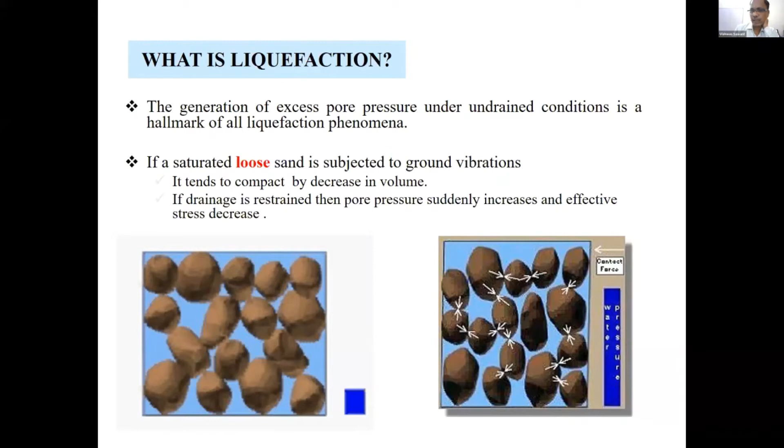Okay, so what is liquefaction actually? Basically, it is the loss of strength in the soil because, in the case of dynamic shear loading, if loose sand is there, it will try to compact by expelling water out from the pores. But because no drainage is available due to the time constraint, this leads to a buildup of pore pressure. As the pore pressure builds up, effective stress, which equals sigma minus u, will be reduced to zero. In that case, if it is a cohesionless soil, it will lose its complete strength and its shear strength will become zero, and it will behave like a liquid. So this is the mechanism of liquefaction.

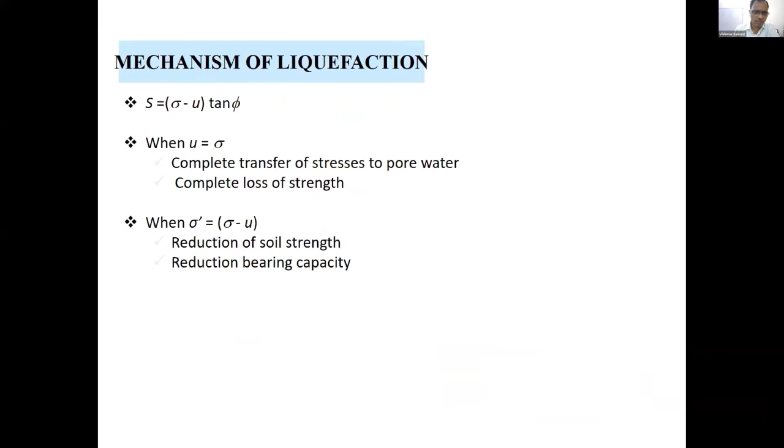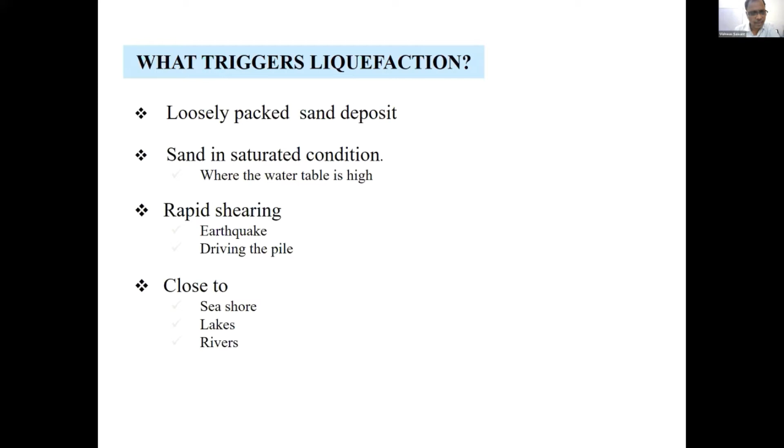I am just quickly rushing through this. There are three conditions required: one, the sand should be in a saturated condition; it should be a loose sand deposit; and there must be rapid shearing. This is very frequently observed near seashores, lakes, and river beds, because all three conditions exist in these particular locations.

Now, what is happening in liquefaction? There will be sand boils, subsidence of the ground, and inundation of the area due to ejected water. There will be differential settlements. Buildings or structures supported on it may overturn due to differential settlements, and there is also the possibility of sinking of buildings.

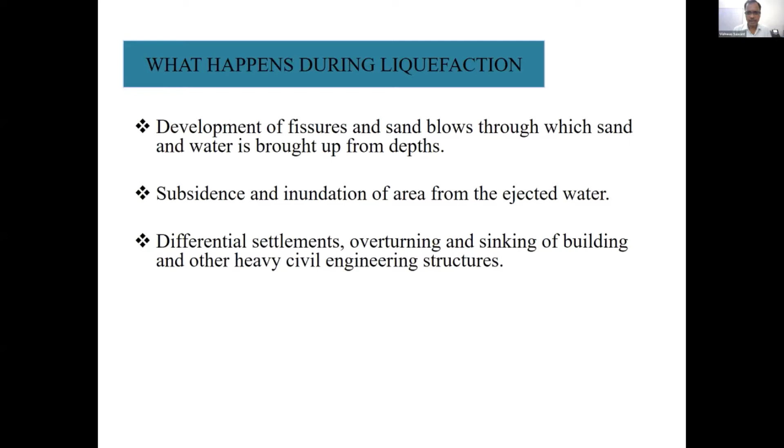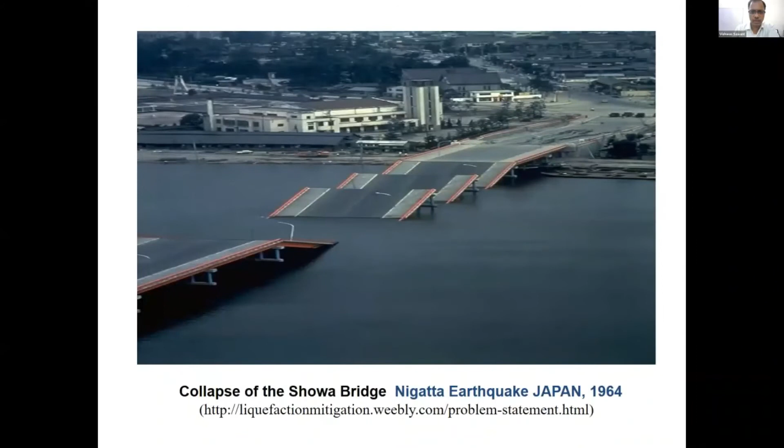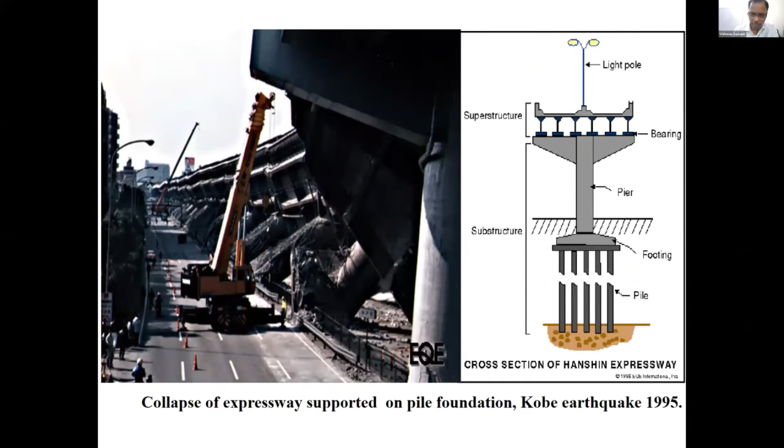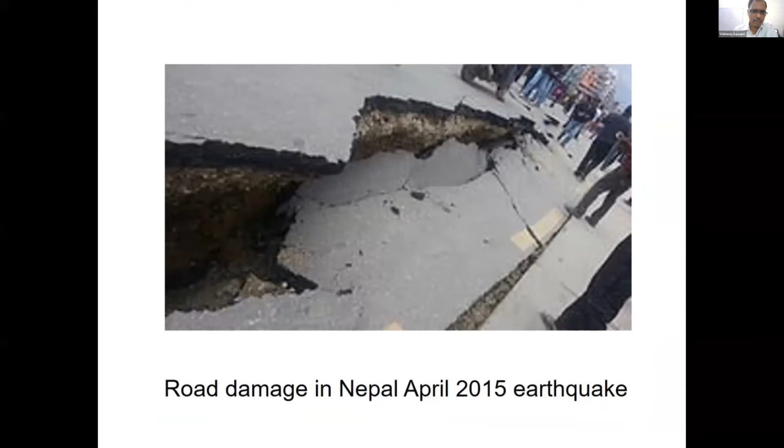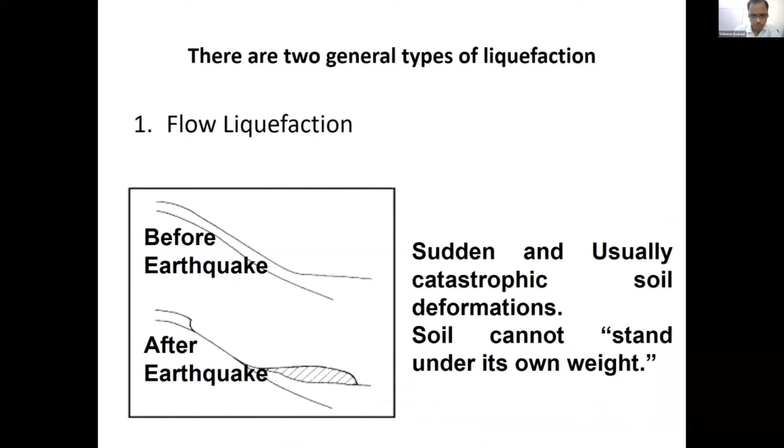Okay, what is happening in liquefaction? There are two phenomena. One is a sudden loss of strength, so the soil cannot stand under its own weight. The other possibility is there may be considerable lateral movement or flow of the soil. We also call this cyclic mobility.

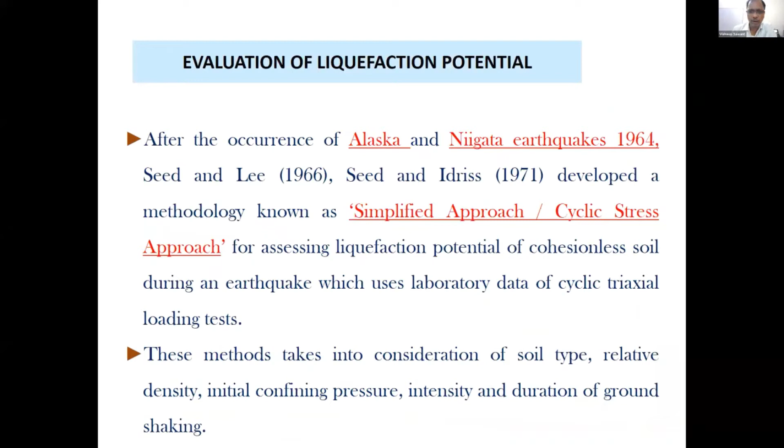Now, people after the Niigata earthquake started working on this phenomenon, starting with Seed and Lee in 1966. The well-known Seed approach is what we commonly use to find out liquefaction potential. This approach is based on finding the stress induced during the earthquake and comparing it with the resistance of the soil. We also call these the cyclic shear stress and cyclic resistance.

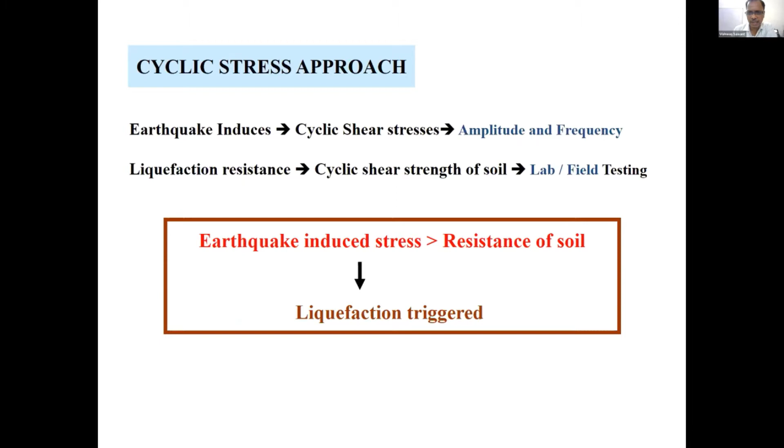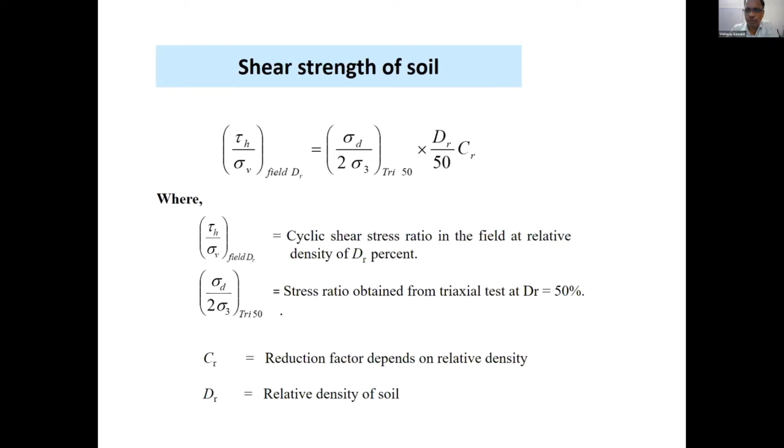So this cyclic shear stress ratio, or resistance ratio, for which the soil can withstand, is calculated by the equation tau h by sigma v in the field at a given relative density, calculated from the ratio of cyclic stress ratio sigma d by 2 sigma 3 in the triaxial test at 50% relative density. Then we proportionate it with respect to density, that is dr by 50, and multiply it by a reduction factor which varies from 0.57 to 0.7. Then, if tau average is greater than tau h, it will be liquefying. This way we can find out the zone of liquefaction.

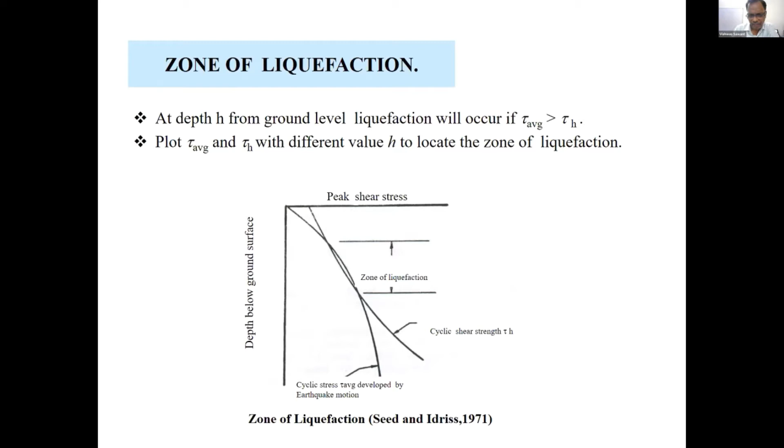Now we'll go to the modeling aspect, because the approach suggested earlier was for a phenomenon involving a semi-infinite medium, where no weightage was given to the drainage path, which is an important factor in the distribution of pore pressure. To consider this importance of drainage path, we can model it numerically, so that if we are planning various mitigation measures, the effect of drainage path can be accounted for. That is the main purpose of modeling liquefaction numerically.

So we will discuss three models. One is the Finn model, then there is the UBC sand model used in Plaxis 3D, and there is the Pastor-Zienkiewicz model, which we use for coupled analysis.

Now, the Finn model: in this model, we are using an effective stress-based principle, and it was first developed by Martin et al. in 1975, later modified by Finn and Byrne. This model is based on the computation of volumetric strain, basically computing volumetric strain at every cycle. Because drainage is not permitted, there will be an equivalent development of pore pressure.

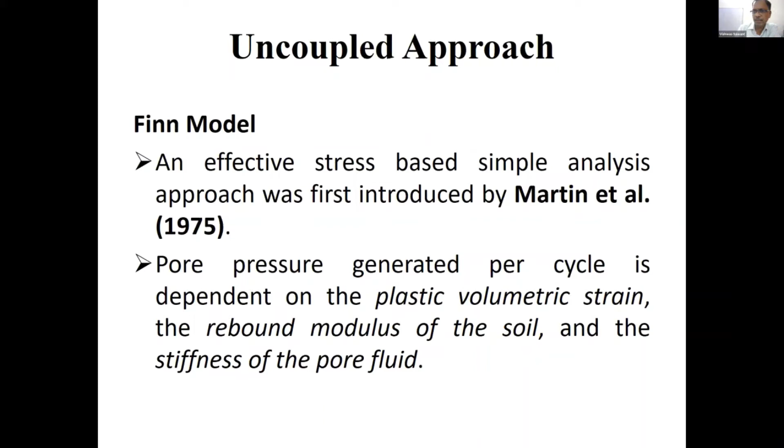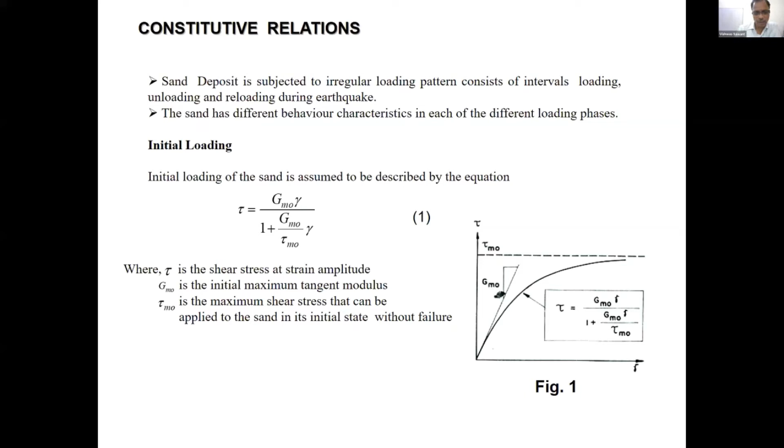That is the concept in the Finn approach. We can see these are the basic requirements for modeling the shear stiffness of the ground, but we are not going to cover it here, because our main concentration is on the assessment of pore pressure.

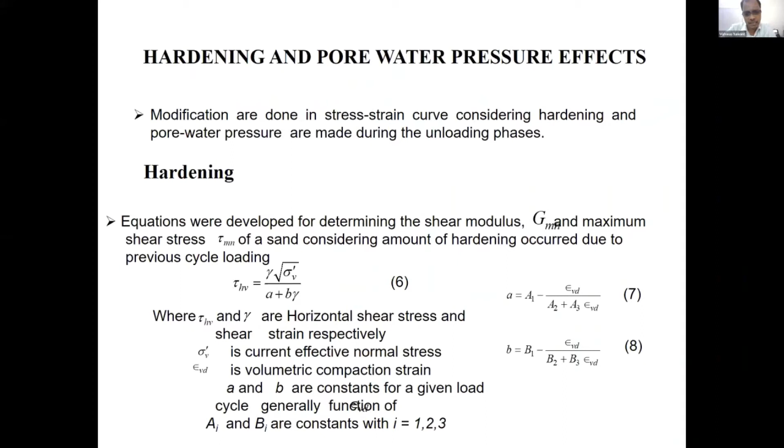Pore pressure can be calculated using constitutive laws which are used to calculate stiffness of the soil, but now I am going to the important factor. So what we do is, for every cycle, we try to calculate the corresponding volume change and volumetric increment for a given cyclic shear strain. That was the principle behind it. So this is now the calculation of pore pressure by the Finn model.

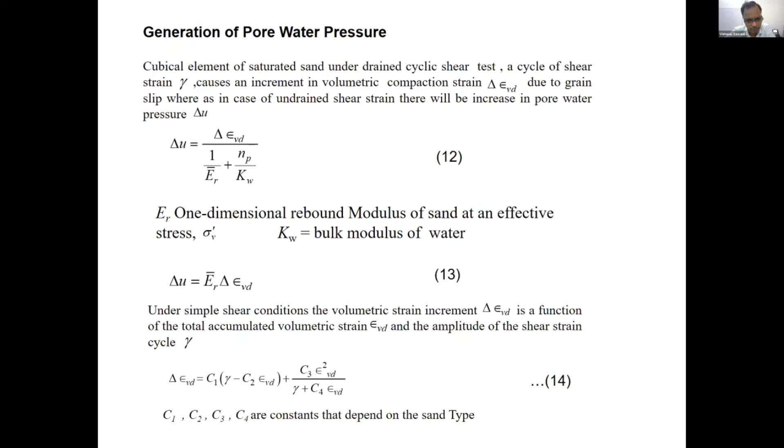You have to multiply it by the rebound modulus of sand, and when you multiply by the rebound modulus of sand, as seen in equation 13, we get the excess pore pressure that will be developed during that particular cycle. So we keep updating the volumetric strain and corresponding pore pressure at each cycle. That is how the Finn model works.

These are the formulas. We call this the uncoupled approach.

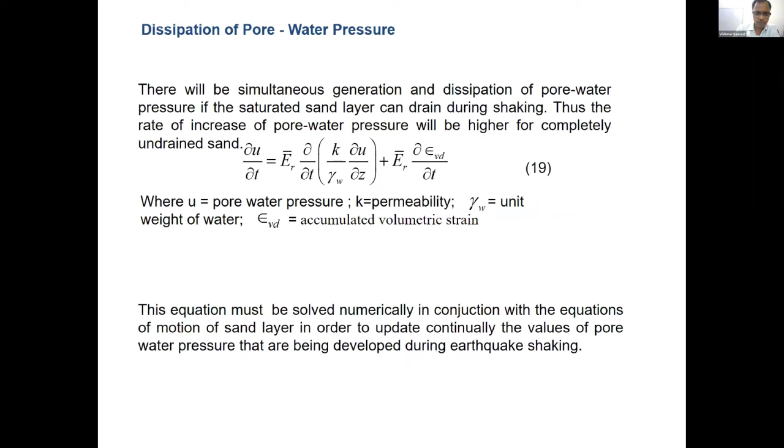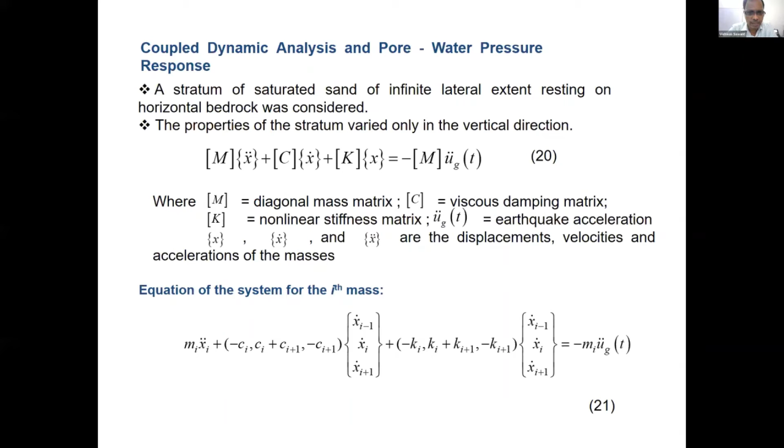Then in this case we also try to solve, at the same time, dissipation of the pore pressure by solving equation 19 using the finite difference method. We can club these two together for accumulation and dissipation of pore pressure using equation 19 also. And obviously the basic stress equation was solved using this equation for stress equilibrium conditions in terms of variable x, where x dot and x double dot are the velocities and accelerations of the continuum model.

Now the next approach is the partially coupled approach. This is used in Plaxis software. Here you use a UBC 3D PLM model developed in Plaxis.

So in this case, what we have done in our study is modeled an embankment resting on a sandy strata. We have computed the pore pressure development and response for three models. One is the embankment with plain soil, which we also call the benchmark model.

Then we tried two mitigation measures. We tried to impose sheet piles on the toe of both sides of the embankment, and third, we gave a gravelly column at the toe on both sides of the embankment. Then we compared the response from all three studies.

So soil and embankments were modeled using 10-node tetrahedral elements in Plaxis. Sheet pile was modeled using 6-node elements, and again the soil column using the same as soil embankment. We applied the El Centro earthquake motion at the base, and then we compared the response for all three models.

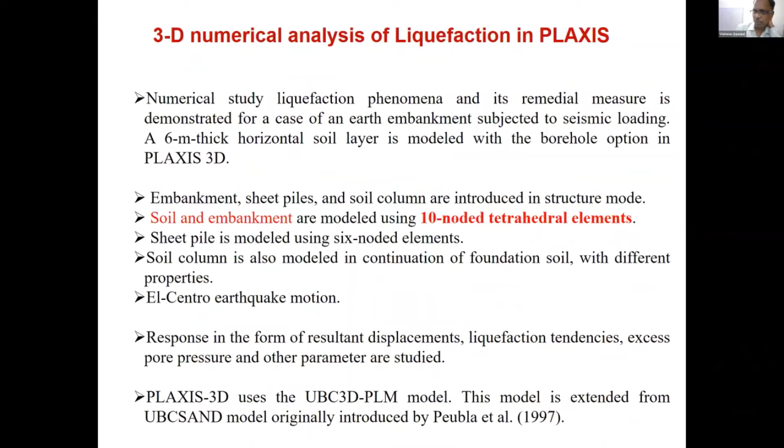These are the basic equations for this UBC 3D PLM model. The first one is the yield function, where you use a Mohr-Coulomb criteria based yield function. Then these are K and G, the equivalent bulk modulus and shear modulus at every stage of constitutive modeling, which can be calculated from the ratio of P by PA, where P is the mean effective stress at that particular time instant on that particular point.

And PA is atmospheric pressure. So depending on that, we always calculate the value of bulk modulus K and G, and we know that our stiffness matrix, the constitutive matrix, depends upon K plus 4G by 3, K minus 2G by 3, and so on.

Then there is a plastic flow vector which will be modeled by the equivalent Drucker-Prager formulation. g is equal to Q minus P times 6 sin psi by 3 minus sin psi, the dilatancy angle. So here we use the Drucker-Prager formulation to model the plastic flow vector.

Then there is a hardening rule given by the next equation, and then there is a densification rule given in the next equation. And the last important part is calculation of excess pore pressure, which is given by the bulk modulus of water multiplied by the volumetric strain increment delta epsilon V.

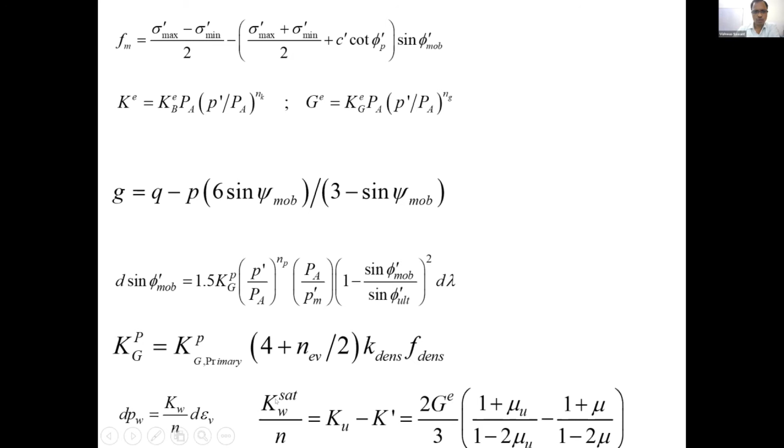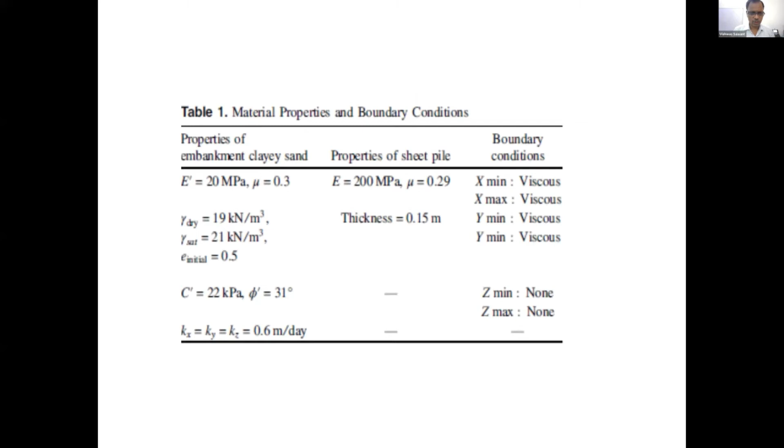Now let's move to the next slide to see the effect of the modeling part. These are the various parameters taken for the soil domain, and the parameters of the UBC model are given in table 2. This can be worked out by conducting a cyclic triaxial test if data is not available.

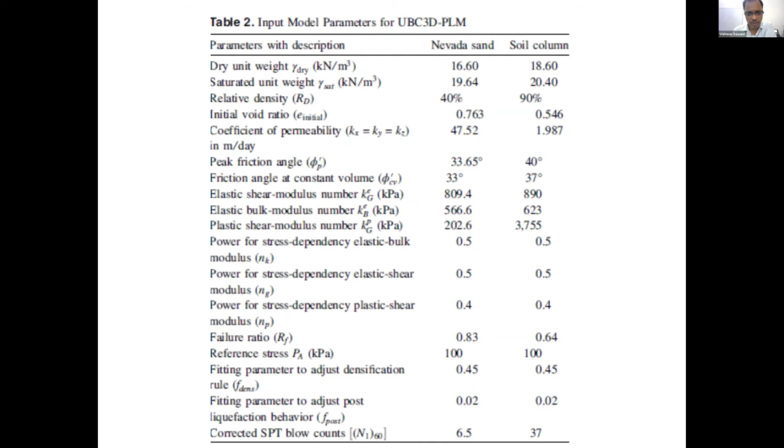Now we go to the coupled approach which we developed here. The Fortran program was developed in the plane strain condition. We modeled a domain with infinite boundary conditions, using here an 8-4 node mixed element.

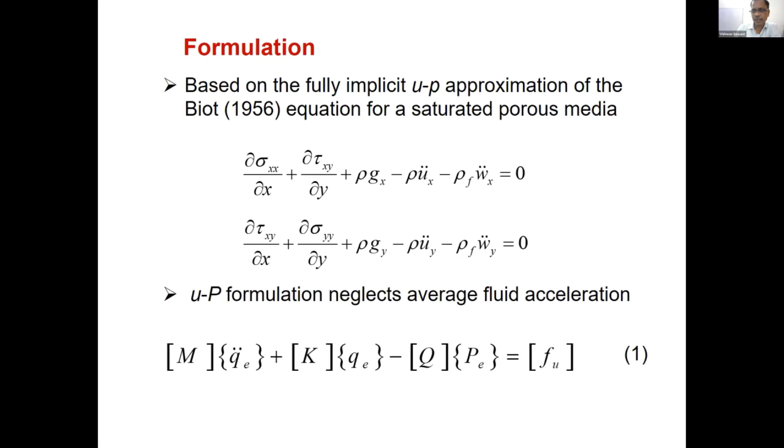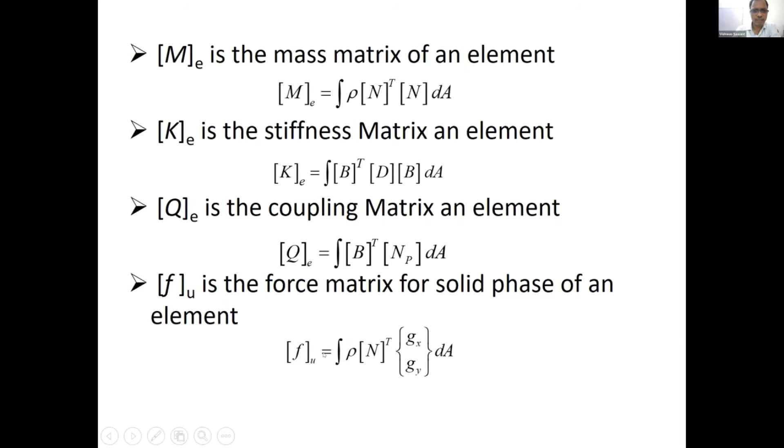We have a Q matrix which correlates the coupling between the two phases. M is the mass matrix, K is the stiffness matrix, Q is the coupling matrix of the element, linked with the normal B matrix and the shape functions of pore pressures, and then the body force factor. All the equations for M, K, and Fu are regular, but there are differences only in the coupling matrix in equation 1.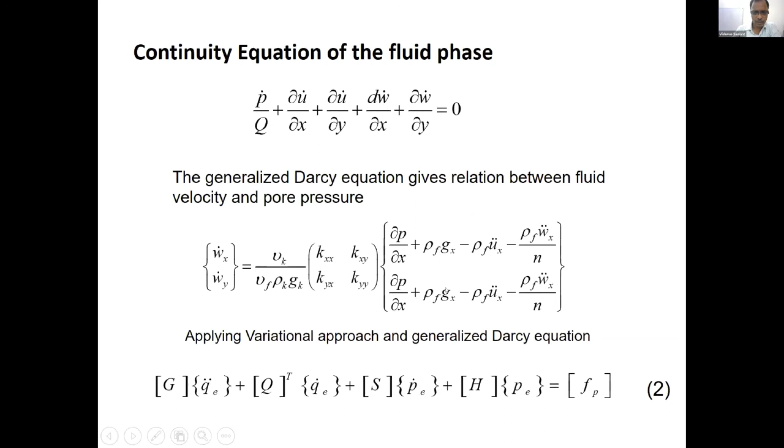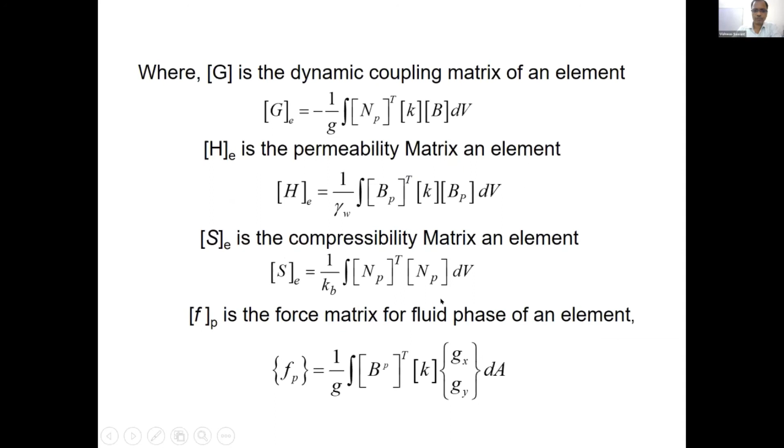Here it will be in the form of transpose. Then we have the S and H matrix. G is the dynamic coupling matrix of the element. H is the permeability matrix, which depends upon BP transpose K BP. S is the compressibility matrix, depending upon the bulk modulus of the soil-water domain. FP is the force vector for the fluid phase.

Then we have used the Newmark beta method for integration in the time domain, with values of beta and alpha as 0.5 and 0.25 respectively. For pore pressure also, we use the same Newmark beta method for integration. Once we apply this method, equations 1 and 2 change into the following form for the time series analysis.

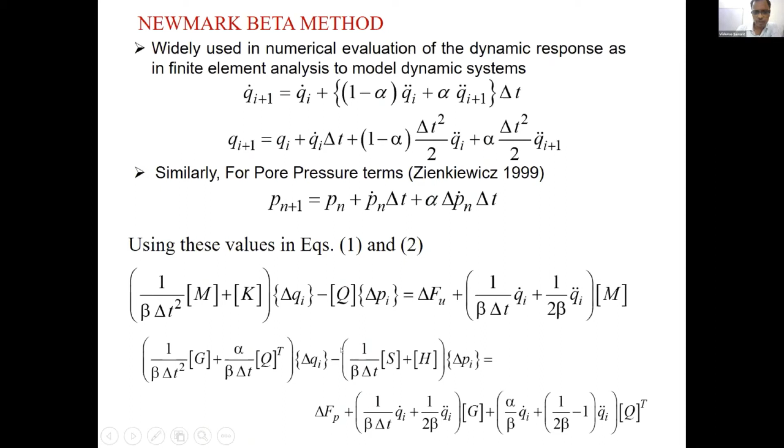Now we have used a Pastor-Zienkiewicz model. If we don't apply any nonlinear model, there will not be any development or accumulation of pore pressure if it is linear behavior. So we must have a constitutive model that can account for the accumulation of pore pressure. The increment relationships are as follows.

Delta sigma equals Dep into delta epsilon, the stress increment, where the elastoplastic stiffness tensor can be calculated using this equation. Here, N and NGL are the plastic flow vector and loading direction respectively, where the stress dilatancy and bounding surface are given in terms of G and F. Then we need to find the flow and loading vectors as dF by d sigma, dG by d sigma.

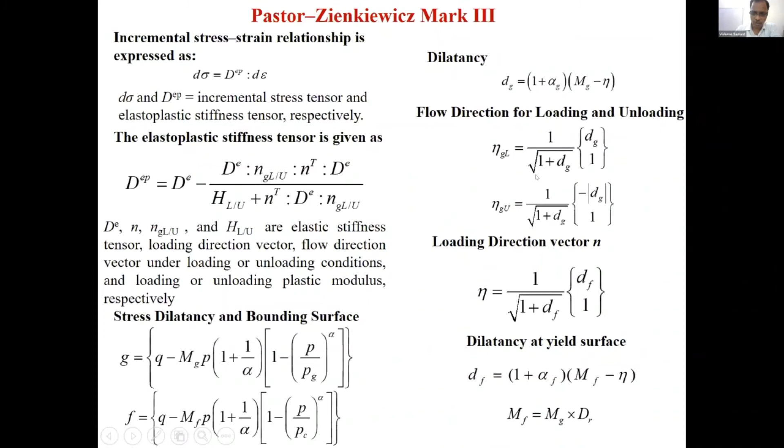So we need to find del G by del sigma and del F by del sigma as flow vector and loading vector, which can be done using these expressions. Now we require the hardening parameter, calculated from these expressions. Once we do that, we can calculate the value of Dep, which we use as a tangential modulus in the next stress increment.

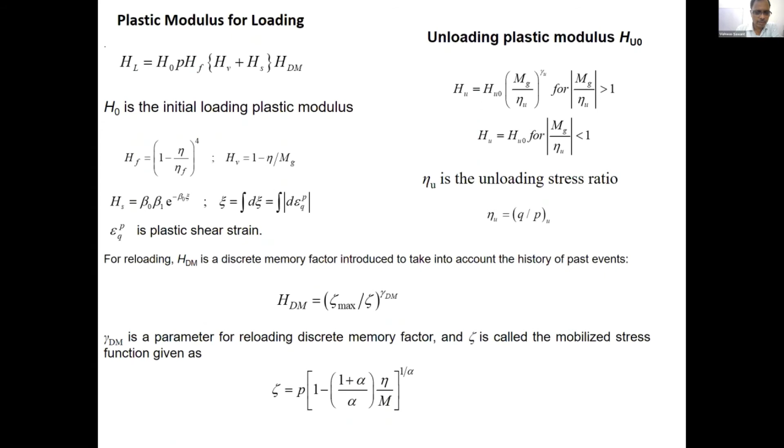This was our model. We modeled a soil of width around 24 meters and depth around 13 meters. Below 13 meters there was a gravelly layer, and on both boundaries there were infinite elements to model the infinite domain. There was also a transmitting boundary in between, whose purpose is to ensure waves reflected from the domain do not reflect back into the domain.

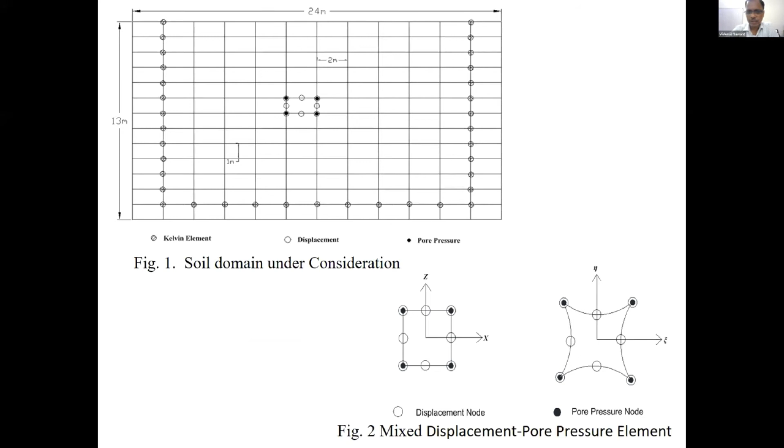You can see here our mixed node elements. So then we compare the displacements and pore pressure calculated for this earthquake motion. We also studied the effect of three soil models: G equal to 6,000 kPa, G equal to 10,000, and G equal to 15,000.

But for the other two models, G equal to 10,000 and G equal to 15,000, the pore pressures are reasonably in the range of maybe around 25 for 4-meter, 6-meter, and 10-meter depths. That means for the other two moduli, liquefaction will not occur beyond 2 meters—only up to about 2 meters, but below that it will not liquefy. That is the effect of shear modulus.

Actually, sheet piles are helpful in restricting the lateral movement, because there is a possibility of lateral movement below the toe, and that we can control by sheet pile. Actually, we have also used sheet pile for offshore pile foundations, for some offshore structures, and for liquefaction also we have gone through.

Not exactly, because at some locations, maybe only at point A, pore pressure was less as compared to the benchmark model. But for all the other points, pore pressure was a little bit higher actually. At points just below the sheet pile, and also at other points E and G, we found that pore pressure was slightly higher than the plain model. But displacements were less. Obviously they were less, yeah.

So sir, where is the main liquefaction pocket here, just below near the toe or below the crest? Below the toe, actually, yeah, it was below the toe. Okay, because with sheet pile we also find the same thing. It was somehow reduced, but not very much.

Then we have used a perforated sheet pile. In Japan, they have been using some perforation along the sheet pile. So that will help, especially for the drainage path and in the case of liquefaction. So for both purposes, I think lateral displacement can also be controlled, and somehow for materials like this. Nice, sir, it's very informative. Thank you, sir. Okay.

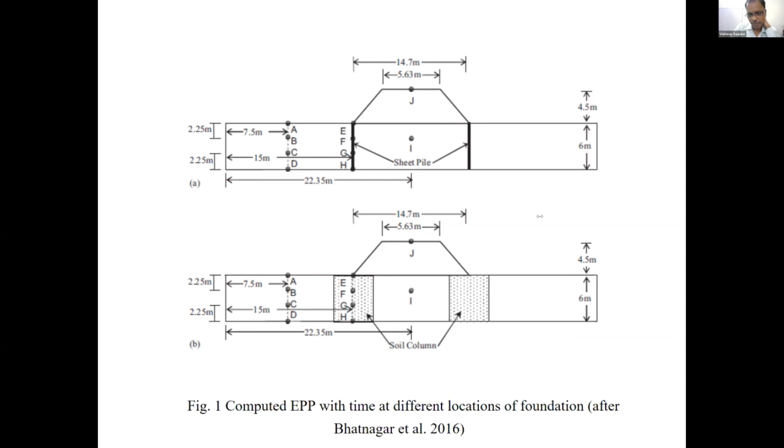Okay, nice. Sir, last question perhaps, this is the last question of this session. Dr. H.S. Mandal has asked, how is this model useful for general surface manifestation study? What is the time required to get the soil liquefied just after the earthquake passes? I think it depends, it depends upon the magnitude also. It is not fixed, it is relative actually, basically depends on how much the acceleration level is here. But we can see from the graphs also, maybe for this particular Kobe earthquake.